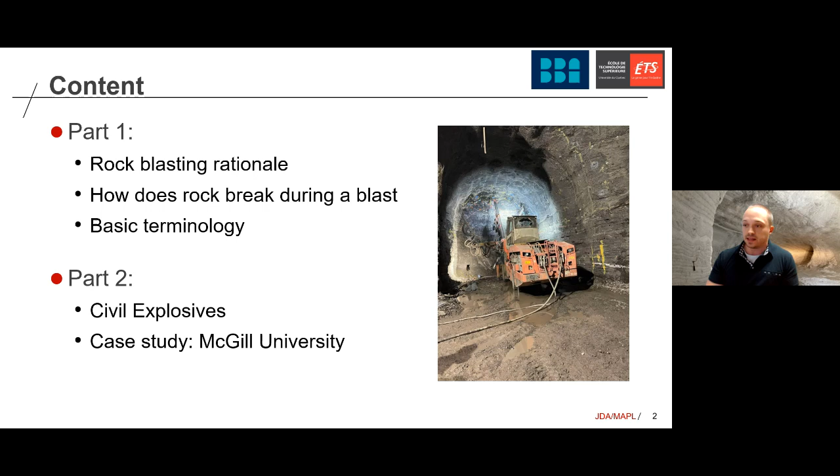So the very first thing about rock blasting intro is: why are we using rock blasting and for what purpose? From a general sense, everybody knows about blasting, everybody knows about explosives, everybody understands that rock is often broken down, loosened, fractured using explosives, but the actual engineering concepts behind them are not so common. There's various applications, from very fine, detailed, precise applications for specific construction projects, to massive bulk blasting operations in the mining industry.

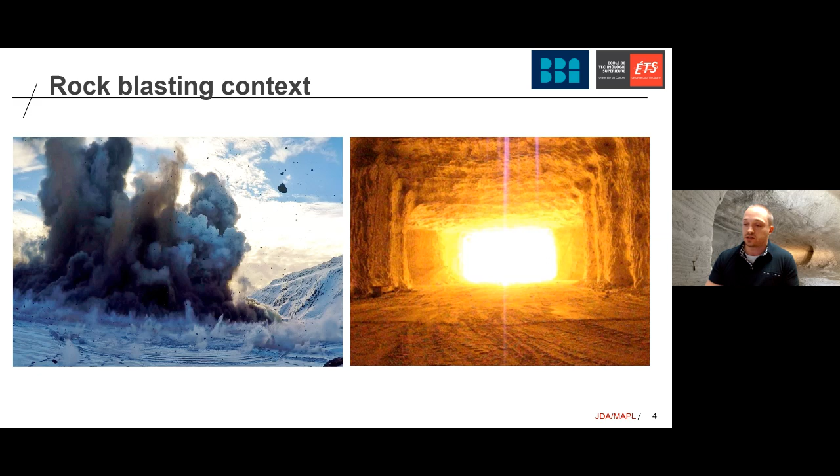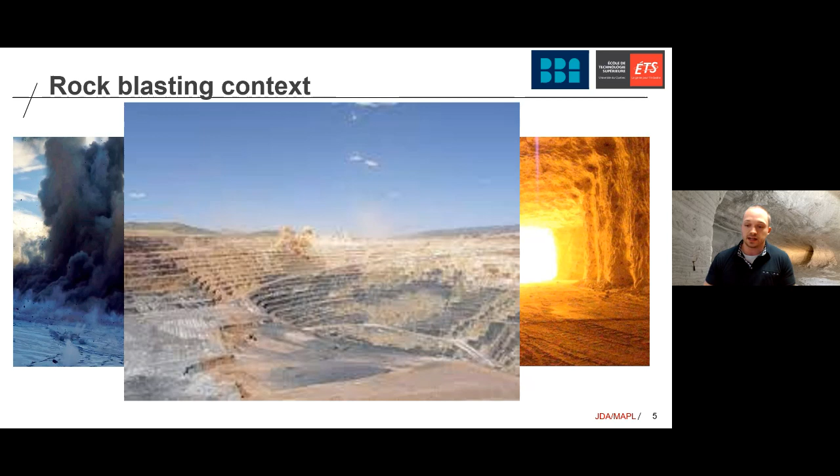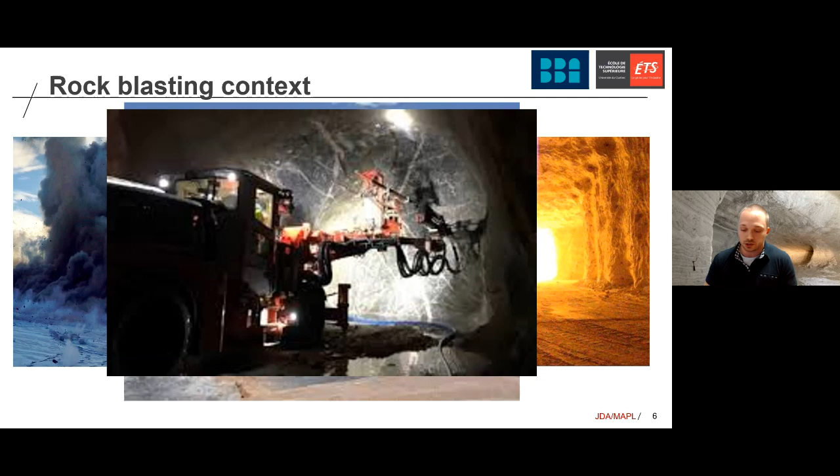So blasting is very core to the mining industry. It's something that we see a lot in the mining industry, whether it's underground or surface. It's something we see all around, almost essential in a large sense to everything that's mining related. Then obviously it's something you see a lot in the construction of underground excavations, including, for example, tunneling operations. It's very central to these applications, something that is still very prevalent despite the growing popularity of continuous miners and tunnel boring machines. Blasting, for those of interest, is also very common in highway and railroad construction.

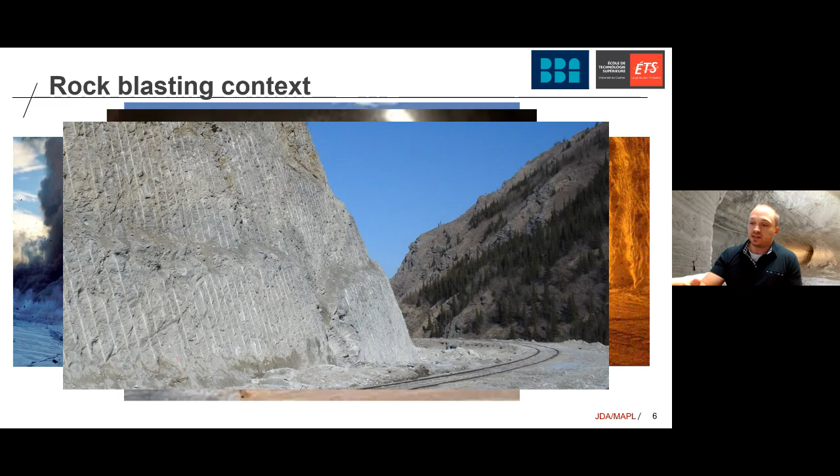You see a lot when you go to mountainous regions where you have nice and smooth roads. You'll see those nicely blasted surfaces along the road with those half moon, clearly demarked position of the blasted surfaces like you see on this picture today. You'll see that very commonly, and obviously in tunnels, like I mentioned.

A few notions: rock blasting has been around since the invention of black powder in the 17th century. Blasting took a major turn with the invention of dynamite by Alfred Nobel in 1867. Rock blasting to this day represents the most efficient and cost-effective means to break rock. It's important to understand this rationale of cost-effectiveness. It's the most efficient, cheapest, easiest way to break rock, given the mechanism of trying to fracture the rock in tension rather than trying to compress it.

There are other means of doing this, whether it's continuous miners or tunnel boring machines. Cost-wise and energy consumption-wise, this remains by far the most efficient way of doing this. Hence its prevalence in various applications, especially in the mining industry.

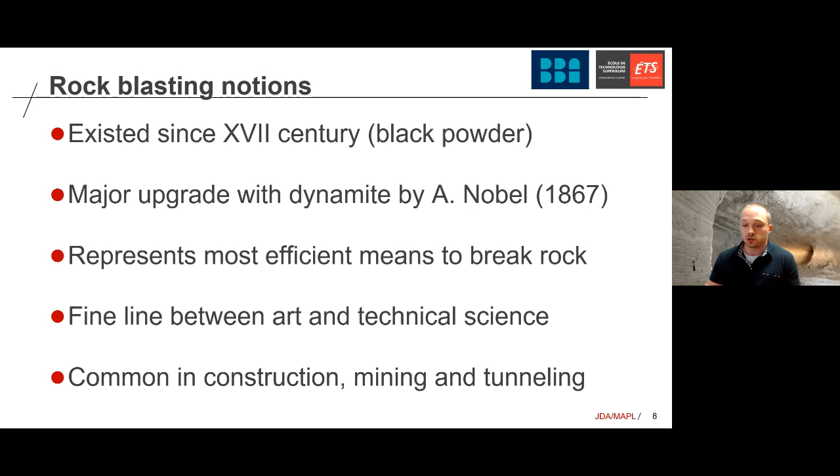If you talk to a blaster tomorrow, you'll see that there's a fine line between the technical science, the technical rationale that this operator, this blaster knows, and what he would refer to as his experience, but also what you hear about as art. I think it's important to demystify the technical from the art, actually understanding that the art of blasting essentially relies on key engineering precepts, which I'll try to showcase briefly.

So how does it work? How does rock blasting take place? What are the key mechanisms behind it? The first, I guess the chemical bit of blasting, relates to the detonation reaction.

The detonation reaction relates to the solid or liquid explosive component of the blast hole transforming into a gas. This chemical reaction, this transformation, takes place at supersonic velocity. It happens faster than the speed of sound in air or in the material you're considering. This velocity component is important because at subsonic velocity you're essentially talking about combustion. You can still have pressures, heat, and a change from solid to gas, but what marks it as a detonation, which is the chemical reaction we rely on in blasting, is the speed at which the reaction takes place, which is supersonic.

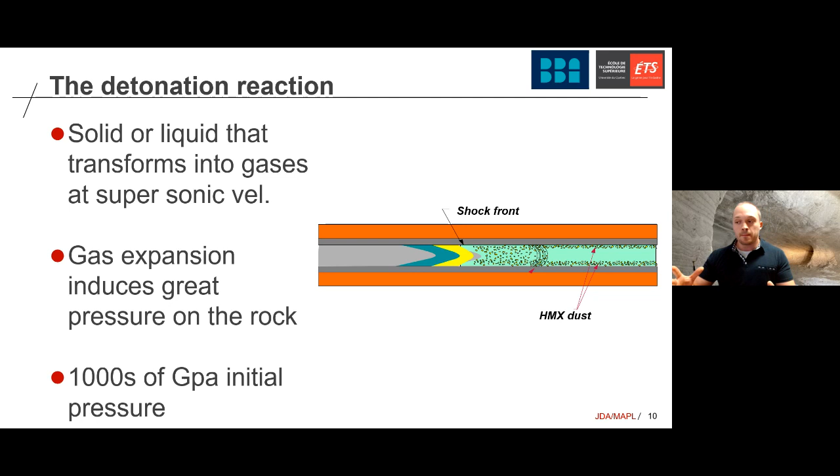When you have this explosive material turning into a gas, you exert great pressures on the rock surface in that blast hole. That pressure is sometimes thousands of GPa. These are massive amounts. Now you don't necessarily have thousands of GPa induced or exerted to the whole rock mass being broken—it's essentially at the blast hole—but this pressure allows it to damage, break, pulverize rock, and then initiate fractures in a way that will eventually propagate to a nearby free surface.

Here's a bit of a visual representation of how the detonation takes place. If you think about the initiation process, you have a cartridge of explosives here. The initiation took place on the left hand side, and as the detonation takes place it propagates through the explosive product from left to right at the detonation velocity. Now you have this gas expansion, and then you have the undetonated component on the right. This transition point from detonated to not detonated, growing gas to still virgin material, is called the Chapman-Jouguet reaction.

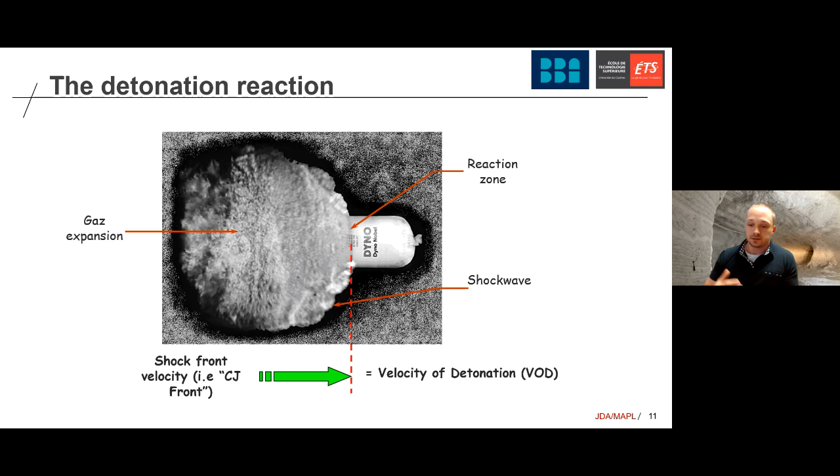Without going into much detail on the chemical aspect, it's important to visualize how this propagates, because if you have a big 10-20 meter long blast hole and the detonation takes place at the bottom of the hole, you have the same propagating detonation reaction going from bottom to top, exerting pressure to the blast hole in that sequence.

So what happens if you look at this in 2D during the blasting event? You have several thousands of GPa being applied to the rock mass, very high pressure. The rock right near the blast hole is pulverized, crushed, completely damaged. This damage zone is not very large—we're talking usually 3 to 6 or 7 times the diameter of the blast hole. But that rock is completely crushed, completely pulverized.

Then, skipping the second part, I'll go right to the third part. You have radial fractures that emanate from this completely crushed part. In between, in zone number 2, you have a mix of radial fractures and completely pulverized rock—it's essentially a transitional damage zone. But what's important to realize is that very close to the blast hole, you have pulverized, damaged rock.

Beyond this, you have a series of radial fractures that emanate radially away from the blast hole. It's important to also acknowledge that the crushing piece, this pulverizing of the rock, is where a lot of the energy of the explosion is lost.

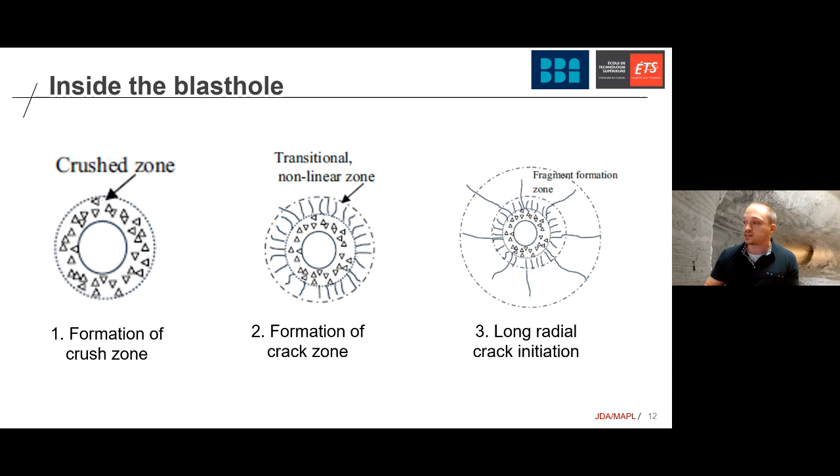Hence, you don't actually have thousands of GPa being transferred to the rock elastically. A lot of that energy is lost due to the crushing and pulverizing of the rock. What's very important from the cratering, the fracturing process, is the later stage, the radial fracture propagation, which we'll come back to in a second.

So now you have those three zones: the pulverized, the damage, and the radial cracks. Beyond the cracks, beyond those fractures, you have this pressure that was reduced, dampened by the damage, that is now transferred elastically to the rock.

In other words, you're sending shock waves away. That's where, whether you're talking about seismic activities, earthquakes, or blasting, that's what you feel. That's the shaking that takes place. This energy is transferred to the rock.

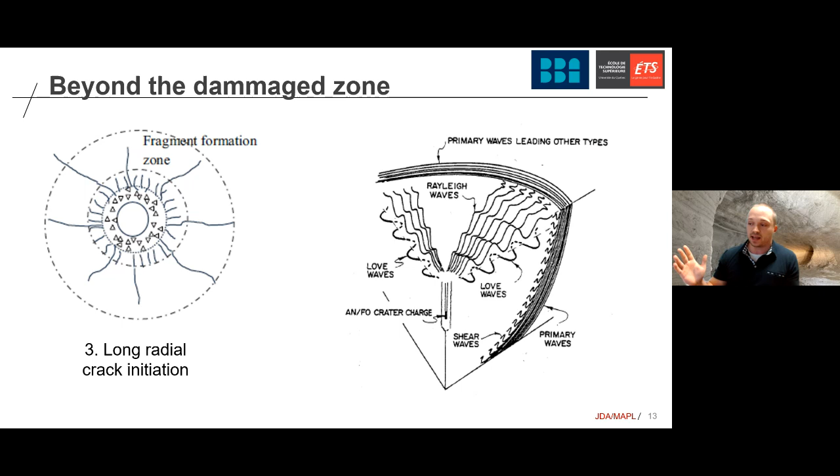Past the damage, it's no longer damaging, at least not right now, but it's sending waves that vibrate everything and potentially impact things around constructions. So this is a bit what it looks like. I think what's important to visualize is on the right how the wave propagates.

It's emitted away from the blast hole. The primary wave - whereas when you're thinking earthquakes, you're always considering the Rayleigh waves, the surface wave, the shear waves - in blasting, what really is important to us is that primary, that compressive wave, what we call the P wave, that compressive pressure emanating from the blast hole towards wherever you're going.

That's the most important wave. That's the highest amplitude in terms of stress wave being emanated by the blast hole. This is what we are designing the blasting based on. So how does it look?

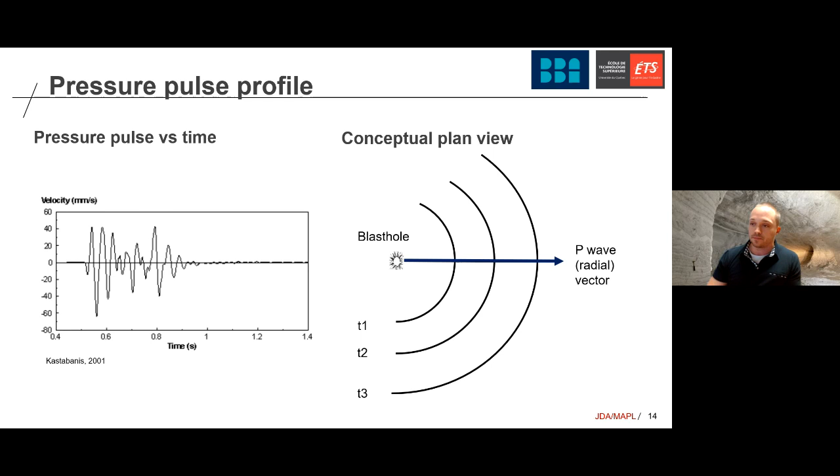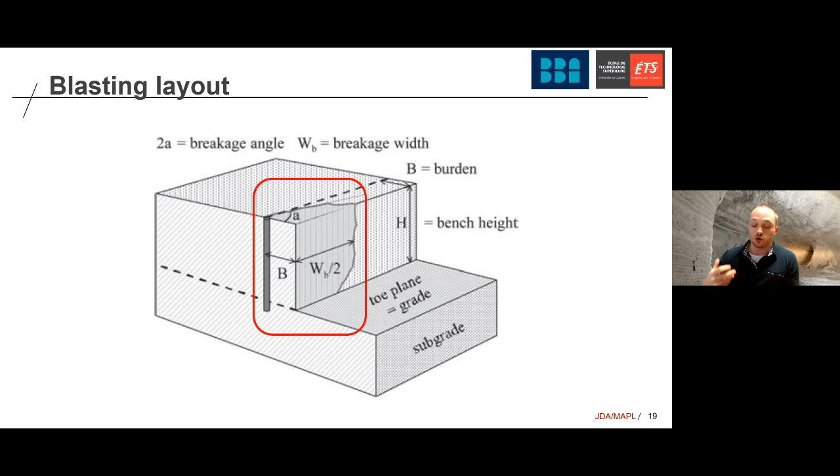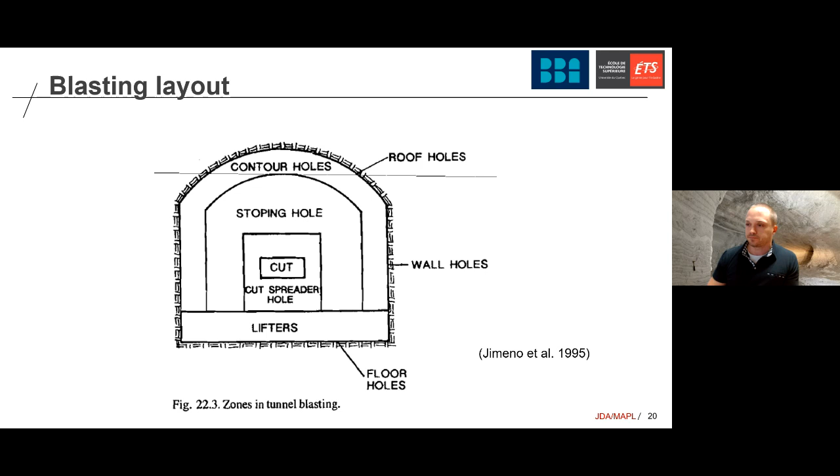So now that we have a sense of the geometry and what it looks like, the question becomes: we know we've got the P wave emanating, but what's actually breaking things? It's important to realize that the crushing and pulverizing I mentioned earlier takes place, but it's not what's driving the overall rock blasting process. When you're blasting, whether in a tunnel or mining environment, you're not trying to pulverize anything. That's not the point. You're trying to fragment the rock so it projects and gets away, and you can conveniently move it around. So what takes place, this fundamental cratering behavior which is essential to understanding rock blasting, is that you have those P waves, those compressive waves, emanating away from the blast hole.

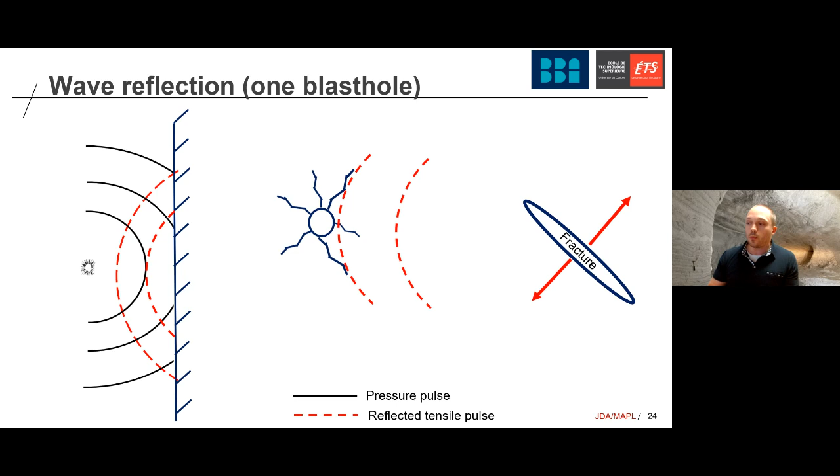Those tension waves travel back towards the blast hole. Now remember, close to the blast hole you have this crush zone, but you also have a series of radial fractures that emanated away from the blast hole. Those tensile waves interact with those radial fractures to essentially prop them open. By propping them open, they expand them until they reach the opening, and that essentially yields a crater, prismatic in look and shape, driven by the expansion of those radial fractures.

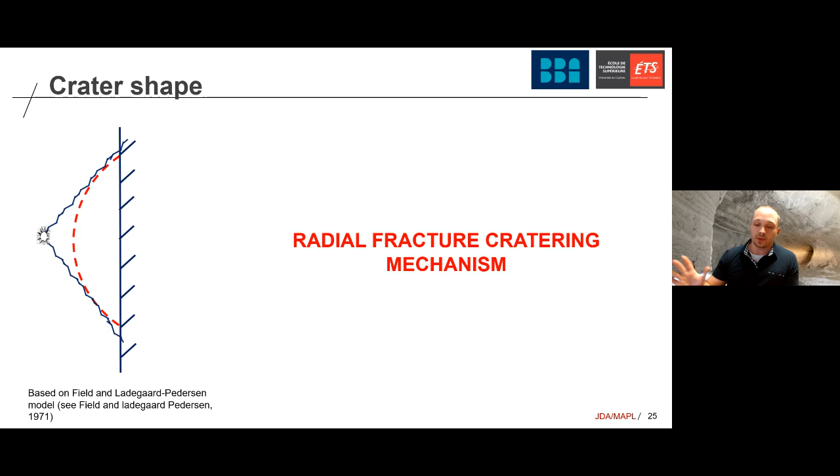So while pulverizing and crushing does take place, what's important is that reflected pressure wave coming back in tension, propping open those fractures all the way towards the free face. This is again a conceptual look of a blast, but what I like to emphasize here is that we often refer to those craters as prisms. The reason being simple: the mechanism behind this is driven by radial fracture propagation and opening.

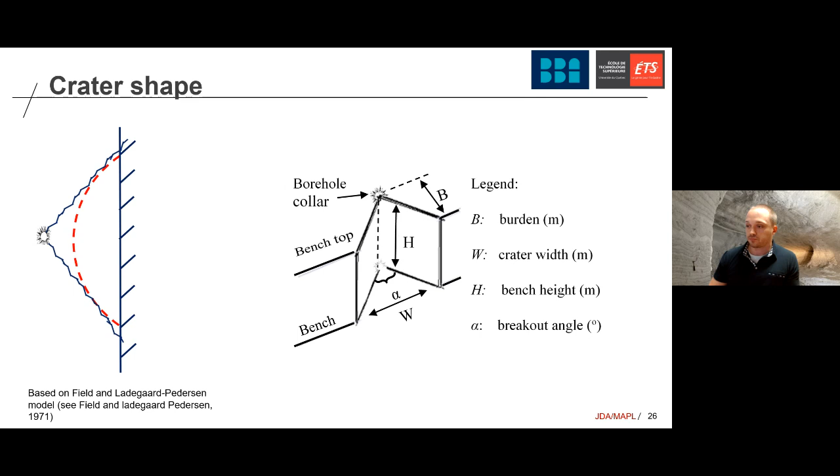So we just talked about fracture propagation. This is essentially driven and induced by the shockwave, the pressure shockwave, coming back and being reflected in tension and opening further the fractures. But what about the gases? Well, the gases also have importance. The explosives went from a solid liquid to a gas, which have pressures. The gases themselves also have pressures, which are not necessarily inducing shock waves.

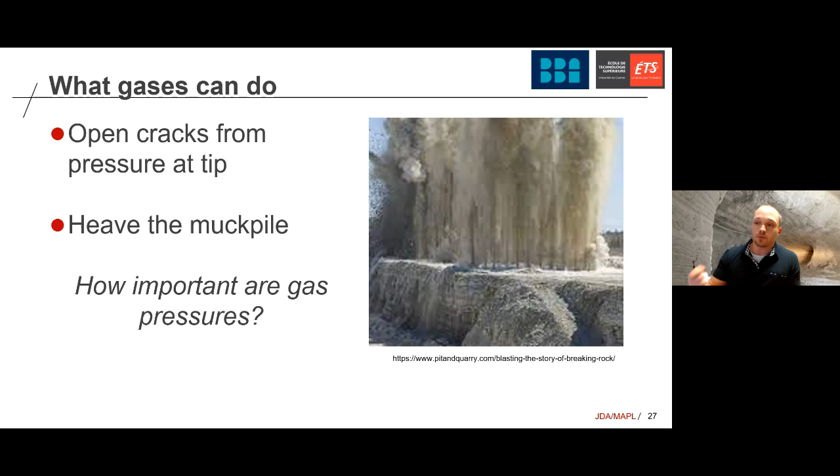They're still there as a pressure. They can open up the cracks, and they can also heave the muck pile. Their importance really resides in heaving that muck pile. There was a lot of testing done in the 70s and 80s to showcase this. They actually added metal plates at the end of a bench, on a small scale model, to show that without the gases—if you put a vent tube in a hole—you'll still get shockwave fracturing. The block will still shatter.

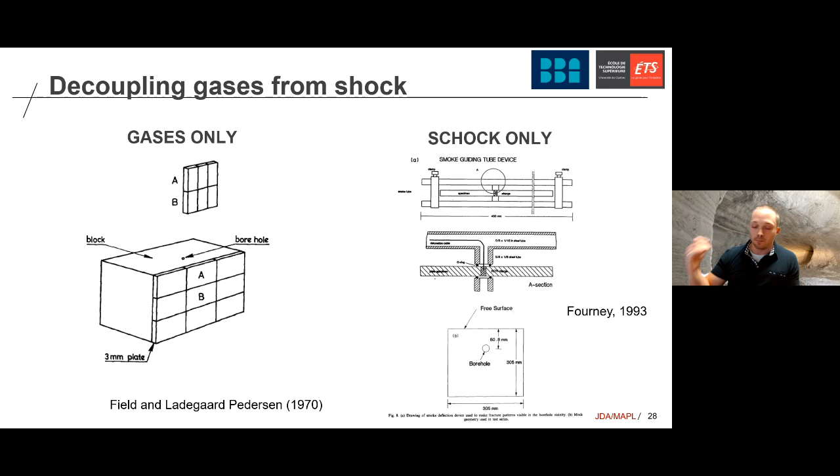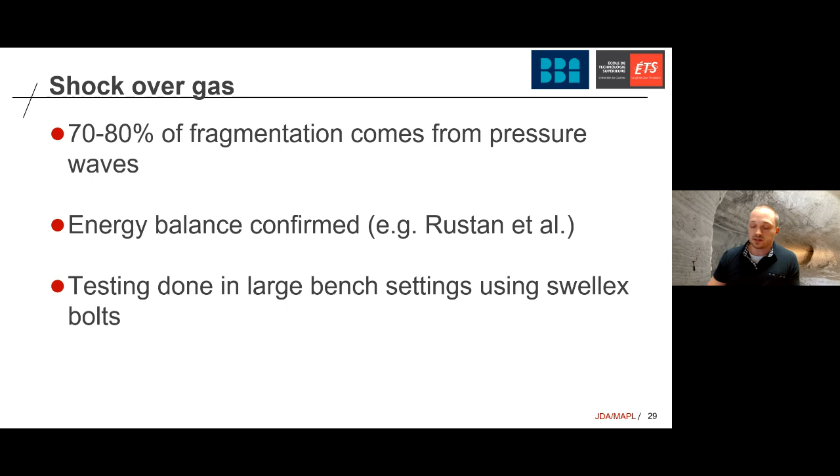Without the shock waves, only relying on gas, you barely get any fractures. So it's very important to realize that gases have some importance in the heave, but the bulk of the blasting, the fragmentation, takes place from shockwave fracturing. 70 to 80% of the fragmentation comes from the pressure waves. There was a lot of testing done to showcase this, and it's important to acknowledge.

So my final notes relating to rock blasting engineering—a bit of the things that a rock blasting engineer, especially in tunnels, has to deal with. What you're trying to accomplish when you design a blast as a tunnel engineer, especially in blasting applications, is to have a cost-effective pattern.

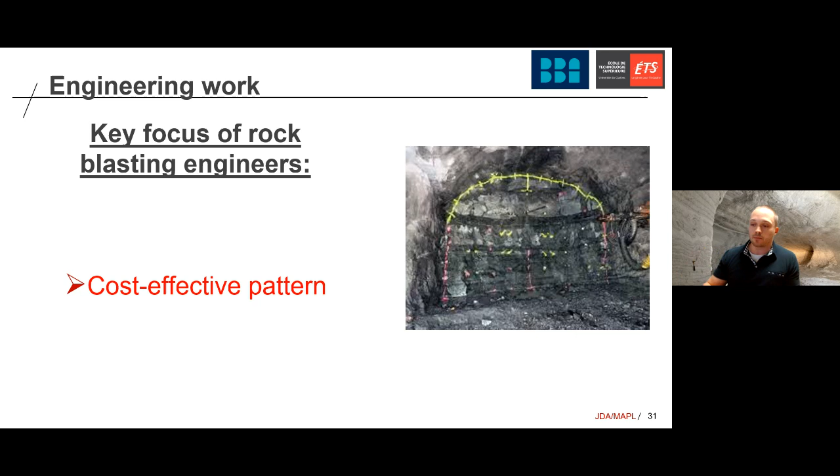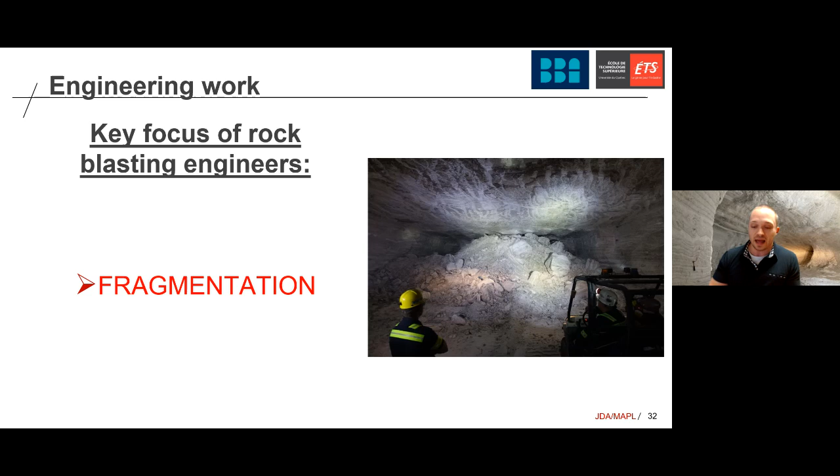You don't want to overuse explosives. This can be very expensive and time-consuming. You're trying to generate a cost-effective pattern. You're also trying to control fragmentation. If you have blocks bigger than your shovel, you're going to have a problem. If you only have fines, only small material, you're going to have muddy environments and challenges handling that material. You're trying to get that fine, ideal fragmentation.

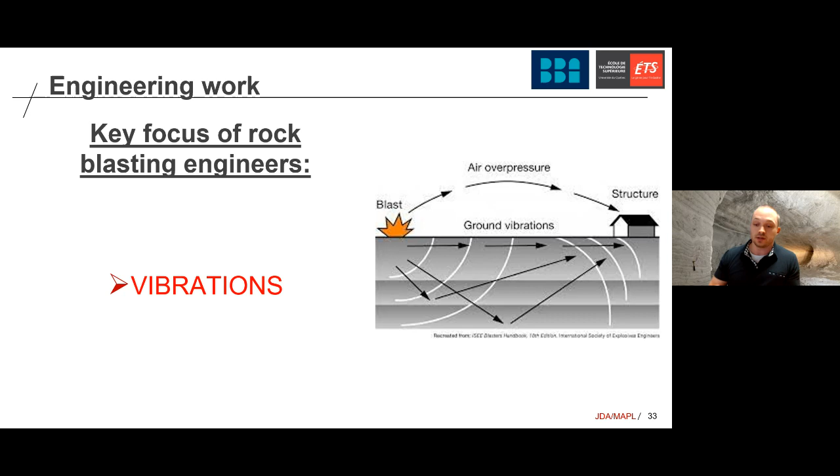Then you're trying to manage vibration, and I'll let Mark talk a lot more about it—he's got very interesting case studies to discuss. Vibrations are a big component of explosive engineering because you don't want to induce too much vibration, especially if you're constructing a tunnel downtown in an urban area where you've got buildings all around.

Then of great importance is also gases—everything pertaining to toxic gases: NO2, NOx, CO, CO2. These are gases that result from the explosive processes, and if you're not ventilating properly, it can be a problem. If you're using too much explosive, going overboard, you can end up with too much gas. It's the role of engineers to control this, mitigate this, and measure this to make sure workers are not overly exposed to those toxic gases.

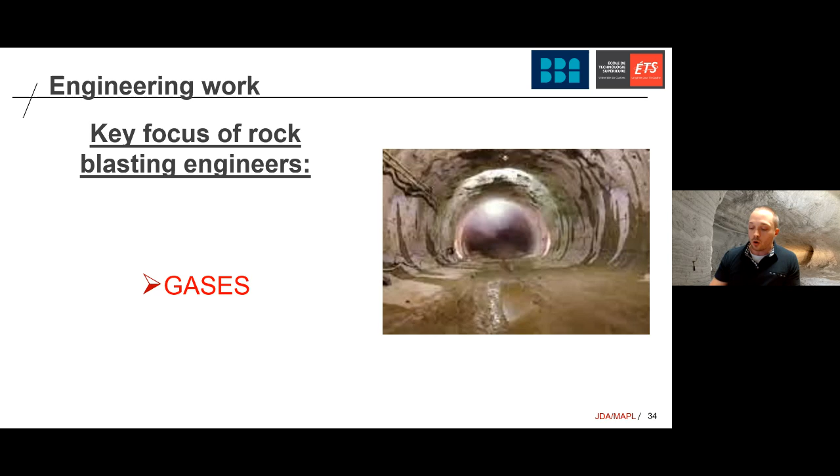So this concludes my rock blasting 101 section. I'm happy with the timing I've got here. I'll stop sharing my screen just for a second so my colleague can start sharing his, and I'll let him do his thing.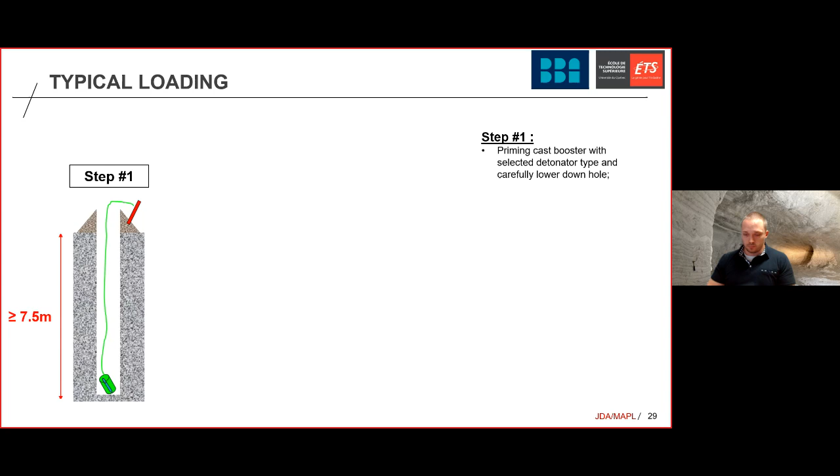So to be able to reach that breakage mechanism, here are the few steps we need to do. We're going to go through the different types of civil explosives we see in this industry nowadays, and we're going to finish with some quick slides about a project BBA worked on in downtown Montreal, which required blasting access shafts and tunnels with explosives.

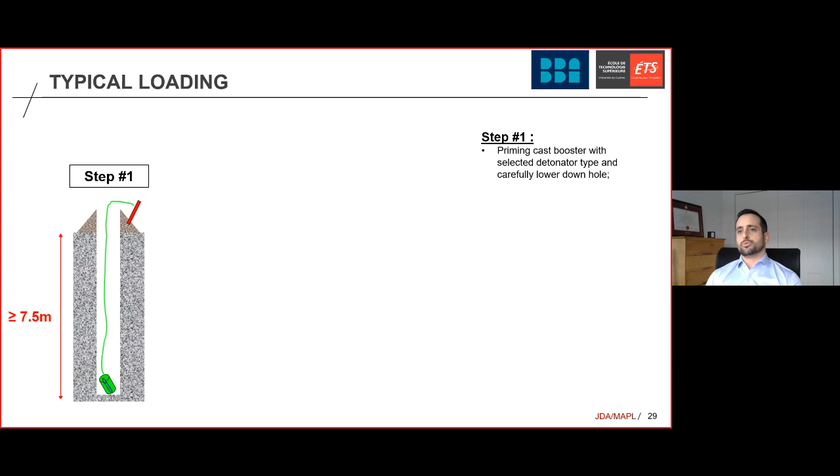So step number one, when you have a hole drilled, you need to load it. The very first step is to install a detonator with a booster. Step number two is to load the rest of the hole with bulk or package explosive.

So any type of blasting you do, there's always going to be a chain reaction. You need a detonator, you need a booster—which is the green little cylinder—and then you need a column of charge. Your detonator will always be the first initiation that initiates the booster, and then the booster will initiate the rest, the bulk part or bulk explosive inside the hole, whether it's package explosive or bulk explosive.

There I put a note: if the hole is greater than or equal to 7.5 meters, you're going to have a second booster. If the hole is short enough, you only need one booster and one detonator. But if it's longer than 7.5 meters, as good practice in the industry, you're likely to have a second one.

Then step number three, we stem the hole. So basically, when you have a hole—no matter the length, no matter if it's vertical or horizontal, open pit, quarry, civil, underground, whatever—as a good practice, you never load the explosive all the way to the collar of the hole. You always leave a section filled with inert material or crushed stone.

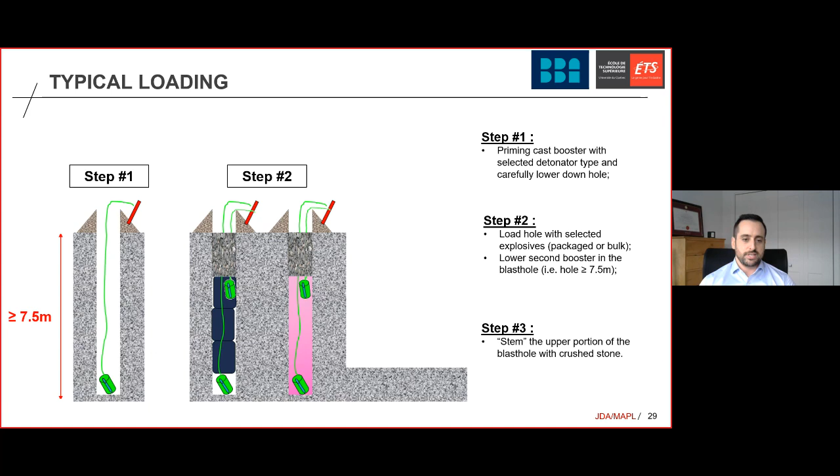So when your charge detonates, there's a certain confinement. As Jonathan explained, you have gases and a shock wave generated during the initiation. Having the upper portion of the hole stemmed with crushed stone keeps most of the energy and the gas inside the rock, which is what we want to break.

Then let's start with what we need to have an explosion, a detonation. Basically we need the detonator. In the industry nowadays, we have four types of detonators: electric, non-electric (also called NONEL), electronic, and wireless detonator.

Wireless, we're not going to cover today. Basically, electronic and wireless are both electronic—the main difference is that one doesn't have a wire and the other one has one. Electric detonators you might not see a lot in the industry during your career, because that type of detonator is kind of disappearing, as everyone's going towards electronic and still using NONEL. One key thing to keep in mind: each of these types of detonators has its own initiation system. You can't initiate an electronic detonator with a system used for NONEL, and the other way around as well.

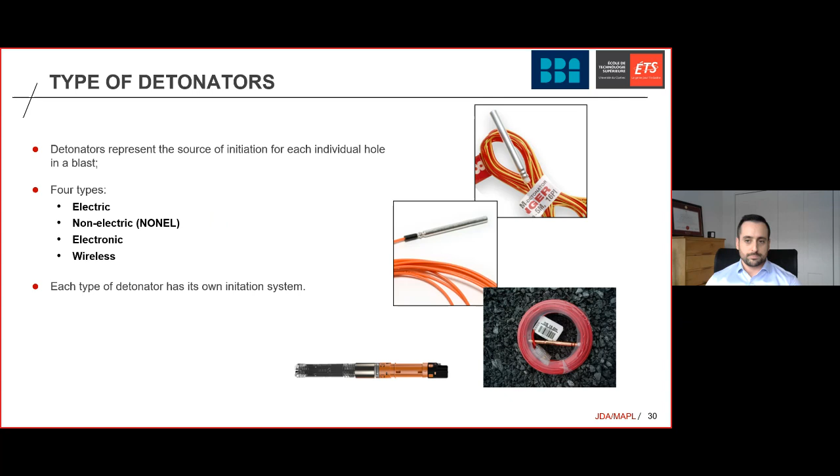Another difference - let's look at non-electric and electronic detonators because they're the ones you're more likely to see in your career in the industry. The main difference between electronic and non-electric is the type of tube or wire. Electronic is literally a lead wire, while non-electric is a shock tube that is coated inside with an explosive powder, which we'll cover in a few slides.

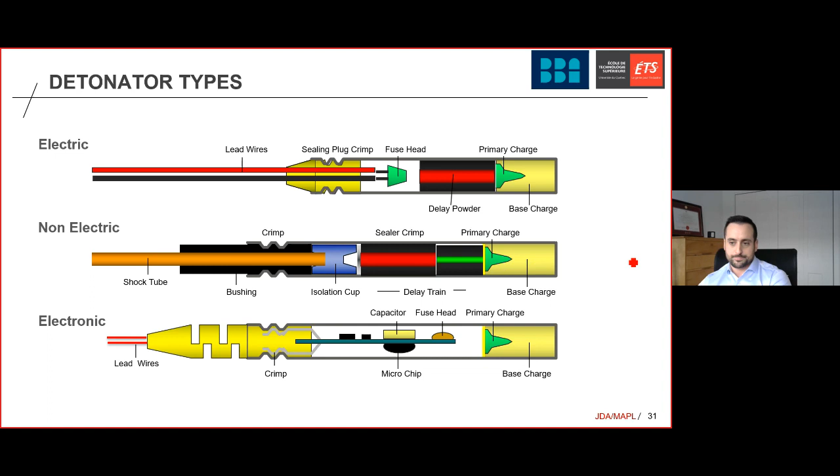The non-electric type of detonator is used quite often in the civil and tunneling industry. One of the key components of non-electric is the tube, the shock tube. It's not a wire, it's a tube with 3 layers, with an inside coating of HMX and aluminum powder.

When you pinch that tube, you're able to fire the powder inside, and this is how the current, or the fire, is given to both ends of that whole system. It travels inside when the powder fires, at 2100 meters per second, which is a quite low velocity of detonation, as you'll see throughout my section of the presentation. One key thing is that when the powder inside the tube fires, the tube stays intact, even during and after the detonation of that powder.

So if after a blast you go back to the field and still see those shock tubes, don't be scared - it's still fired. It's not because you still see the tube that these detonators didn't fire properly.

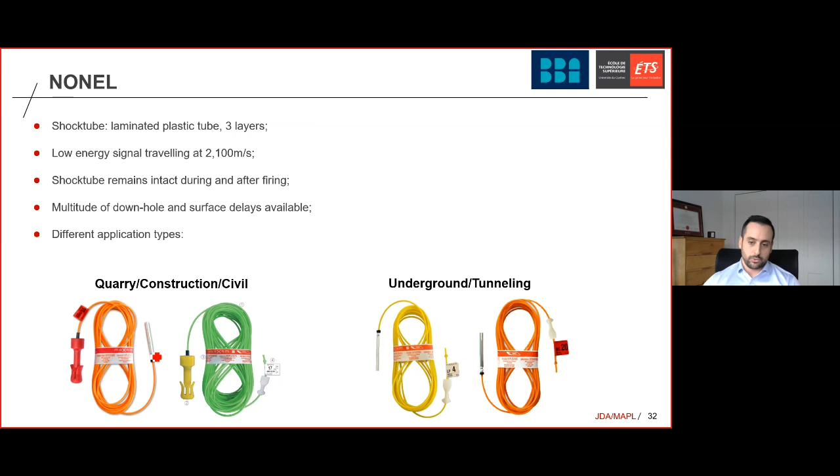There are a multitude of downhole and surface delays in the non-electric world. Unfortunately we can't cover all these types of non-electric detonators today, but keep that in mind - there are different applications. As you can see here, we have 4 different types, some with surface connectors in different colors. One key thing is they all have shock tubes, they all have at least one aluminum shell, which is the main part of the detonator, and they all have pre-established delays, either in the clip that stays on the surface or in the detonator, the aluminum shell that goes inside the hole.

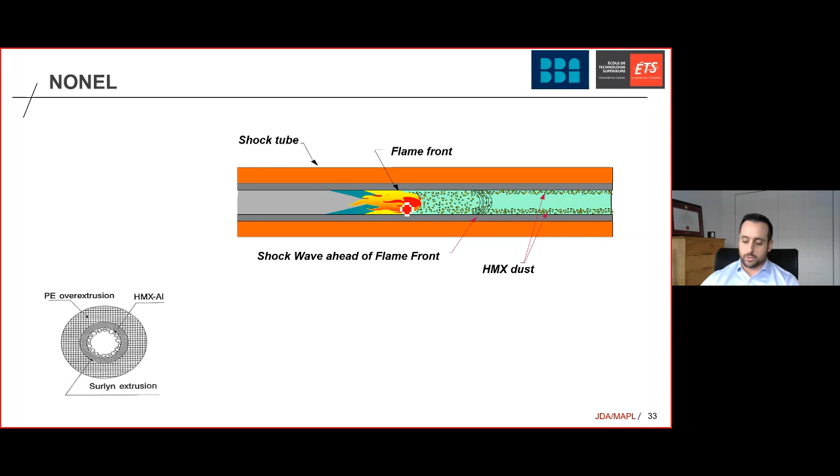Same illustration that Jonathan showed earlier. When the shock tube gets pinched and the powder inside starts being initiated, it travels through, it burns and detonates - well, I'd say it's more a detonation because it's 2100 meters per second, which, depending on the tube, is a VOD between 1800 and 2100 meters per second to be specific. This is how the powder inside the tube fires. Here's a cross section - we can see the different layers of plastic shaping the tube, with the coating inside of HMX and aluminum powder that is meant to give the initiation, or the current, inside the tube to reach the aluminum shell.

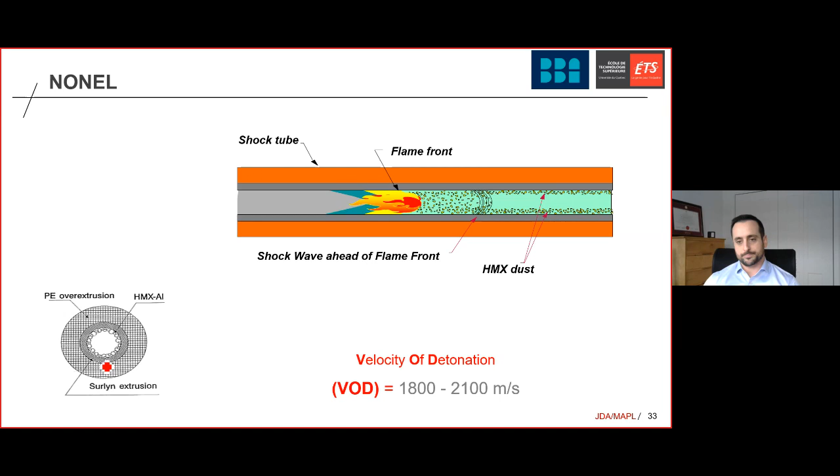One key thing you need to keep in mind when using Nonel is that connections need to be physical. You need to connect the holes in the order you want the fire to be given between each hole. Your first row needs to be connected together first, then you connect it to the second row, third row, and fourth row. While when you're using electronic detonators, you don't need to follow a specific connection pattern. That's the main difference.

Electronic detonators are 100% user programmable detonators. You can give them increments of 1 millisecond at a time. Most of the time, depending on the explosive supplier, the window in which you need to program your detonators will be between 1 millisecond up to sometimes 30,000 milliseconds, or 30 seconds.

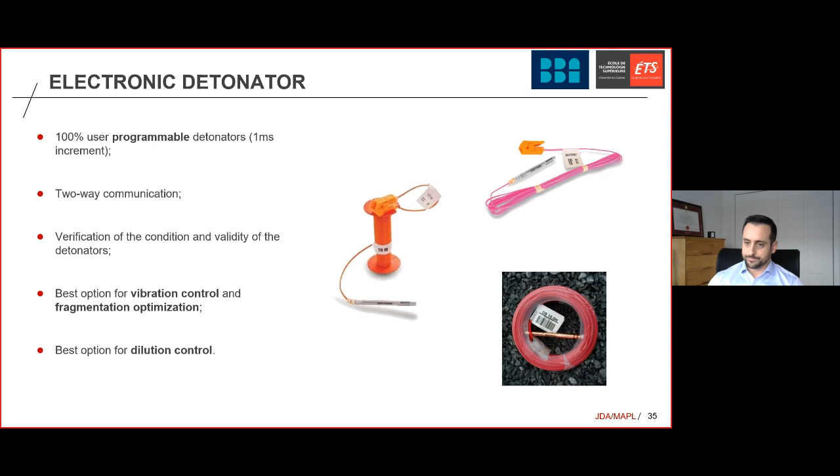Then there's going to be the booster. As I told you a while ago, there's always going to be one detonator combined with a booster, and then the booster will give the initiation to the column of charge. This is the second step in a hole loaded with explosive.

Boosters are used because the third part of your chain reaction, the bulk explosive, is not sensitive enough to be initiated only with the detonator. You always need that second step, which is the booster.

Boosters are also called cast boosters in the industry. We basically pour a liquid mix of PETN with sometimes other high explosive, molecular explosive. The main one we see in the industry is pentolite, which is a mix of PETN and TNT.

In the illustrations on the right side of the slide, these red pellets are going to be 100% PETN, specifically placed in the cast, and the rest of the cast will be the mix of pentolite. This little section here will be pure PETN, because this is where your detonator will go—this is where the section of your booster needs to be the most sensitive.

VOD here—remember this term, velocity of detonation, extremely important. We see here PETN at 7,550 meters per second, which is extremely high.

When you initiate a column of charge, you always need to initiate an explosive with another explosive that initiates faster. You always need more energy, more pressure from the giver, the donor, to the receiver. That's why PETN is used for boosters, to be 100% sure that no matter the bulk explosive you're using to load the blast holes, it's going to be initiated with something that has a higher pressure.

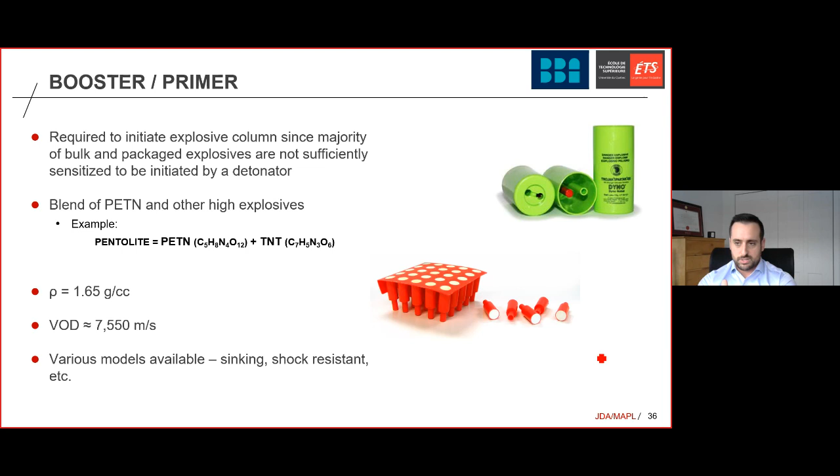This is how you install the detonator inside the booster. No matter the explosive supplier or the model of your booster, they're always going to have one side with one hole and the other side with two holes. You insert the detonator on the side that only has one hole, and then on the other side you loop it back into the cap well. In the cap well, that detonator needs to go into that specific well, because this is where you have the red pellet, the pure PETN section, the most sensitive section of your booster.

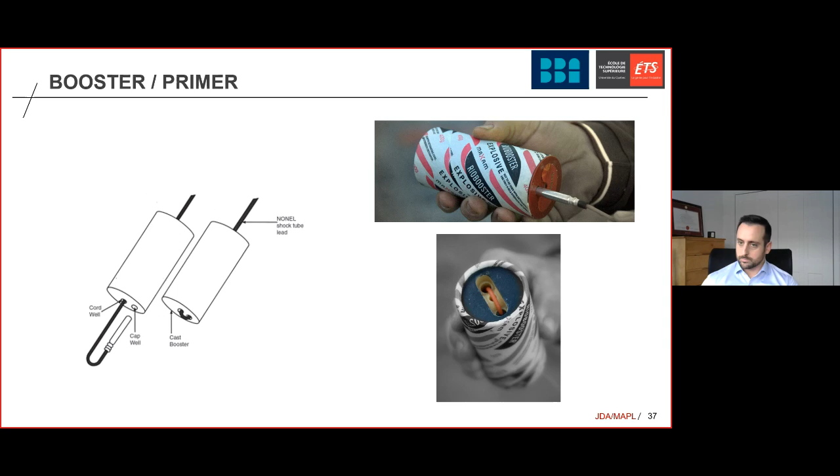Now the third part of that chain reaction inside the blast hole is the bulk explosive. There are a few different types of bulk explosive. Since we only have one hour in this presentation, I went directly to the bulk explosive called emulsion. There are other types, but nowadays this has the best water resistance, and it's the explosive mostly used, no matter if you're in quarry, civil construction, underground, tunneling, or mines. Bulk and package emulsion - you can have it in two different forms, either in bulk or in cartridges. This is the bulk explosive mostly used.

It's a water-in-oil structure, basically a mix of a few components, mainly ammonium nitrate, because ammonium nitrate has the oxygen, and it's mixed with a fuel phase and some other components, a little bit of water as well. The main advantage of bulk emulsion is that you can play with its viscosity and density. Depending on your rock mass parameters, depending on what type of blast you want to do, if you want to reduce your gases, have more shock, more heat, you can play with the density and the components inside.

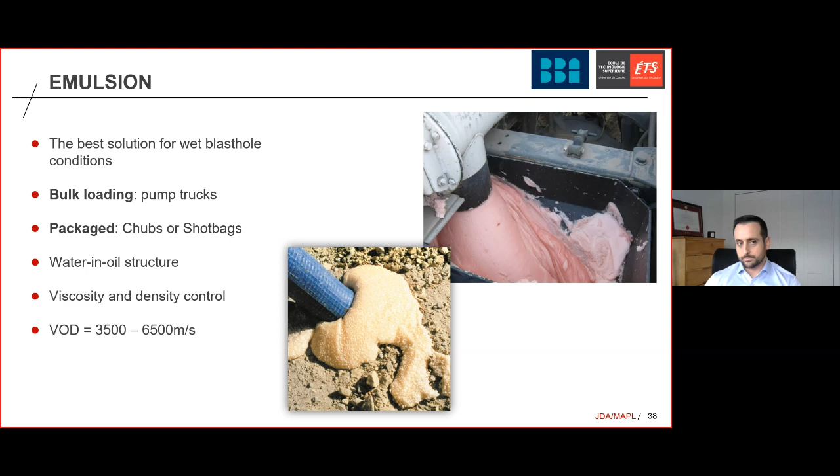Then package emulsion - that's the exact same thing I just showed you, but put inside cartridges. This is used in tunneling blasting, one of the mostly used types of explosive there. It's emulsion put inside cartridges or plastic films. The main advantage is that it's easier to load, easier to carry - you just need to carry boxes. You don't need to bring the big bulk truck, because underground, for tunnels or shafts, bringing bins and trucks is a bit more complicated. So bringing boxes with package emulsion is easier, and you can control more easily the amount of kilograms of explosive you put inside the hole, especially when you need to respect your vibration limits. You don't want to start losing explosive and creating pockets in cavities if they exist. Package emulsion gives you better control of the kilograms of explosive amount.

These explosives can be used depending on different mixes - as you can see, some have different colors, some have other components. You can still see the solid ammonium nitrate prill inside some of these products. They have different forms, different diameters, different lengths, so they have a lot of different applications, from pre-splitting, decking, difficult hole conditions, trenching where you only have one free face and all the holes are extremely close to each other, where you can sometimes have extremely high shock wave levels.

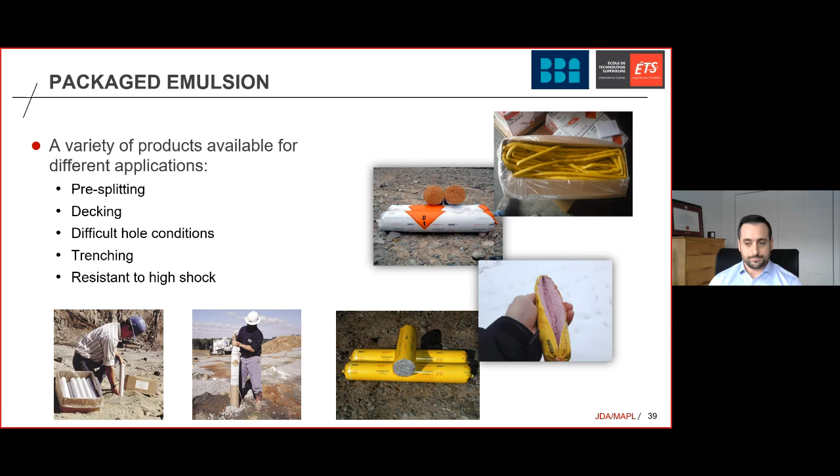Another type of packaged explosive is dynamite. Dynamite is still a product we see in the industry, but it's kind of disappearing because it contains nitroglycerin at 50%. Nitroglycerin is extremely sensitive and extremely powerful. Since the 80s and even before, there's been a lot of accidents at manufacturing plants, where literally the plants totally disappear when an accident starts a fire and explosion. There's nothing to do, it's too late.

So companies started going more towards packaged emulsion. Even though dynamite is extremely powerful, with a range of 5,000 to 6,000 meters per second, you'll still see it in the industry once in a while in very hard ground conditions. It's a product that can withstand high shock in the presence of water. For example, when you have a lot of holes close to each other, the dynamite can withstand the shock from neighboring holes firing before. I still wanted to cover it because in tunneling, once in a while, you're going to see dynamite used.

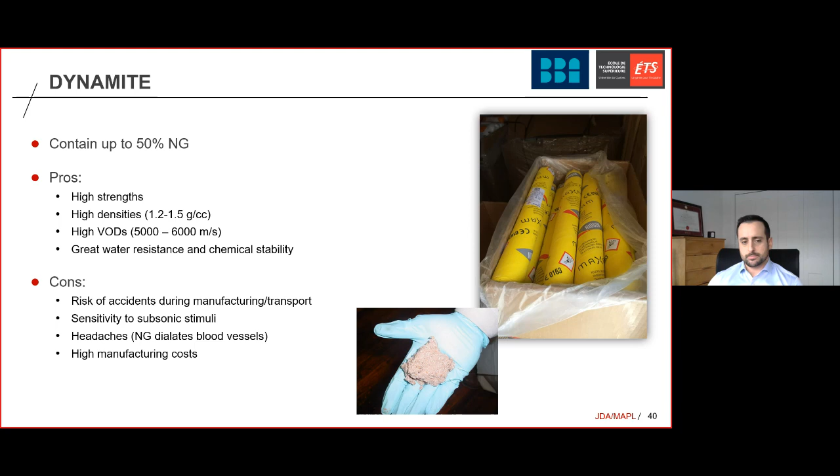The last type of civil explosive you'll see in tunneling is detonating cord. Basically, it looks like a rope with a core of PETN. PETN is the exact same explosive we find in boosters, so we have a very similar VOD.

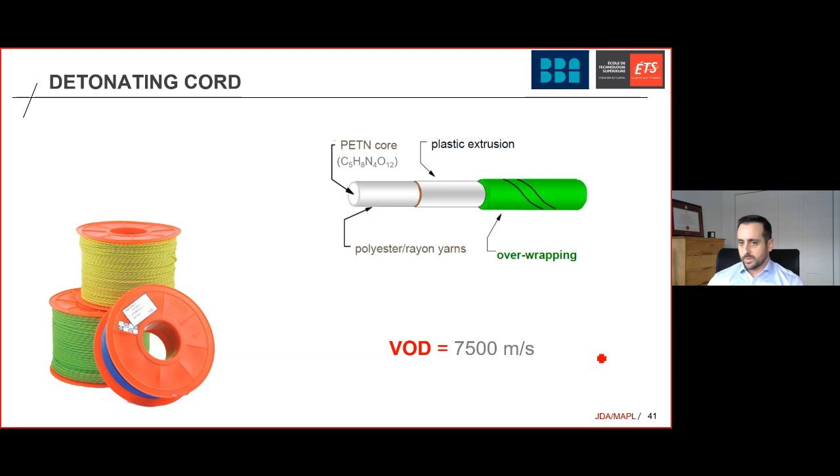Now we're going to talk about that case study. I kept it very brief. That's a project we worked on downtown Montreal, under the McGill Hospital. There was an already existing tunnel network, shown in blue and green on the picture. What we needed to blast was the red section.

We had one access shaft and three accessory or auxiliary shafts, and a network of tunnels linking these shafts together. It was done between April 2014 and April 2015, right under the McGill Hospital. We were extremely close to existing structures, buildings, hospitals, and surgery rooms, so vibration control had to be followed.

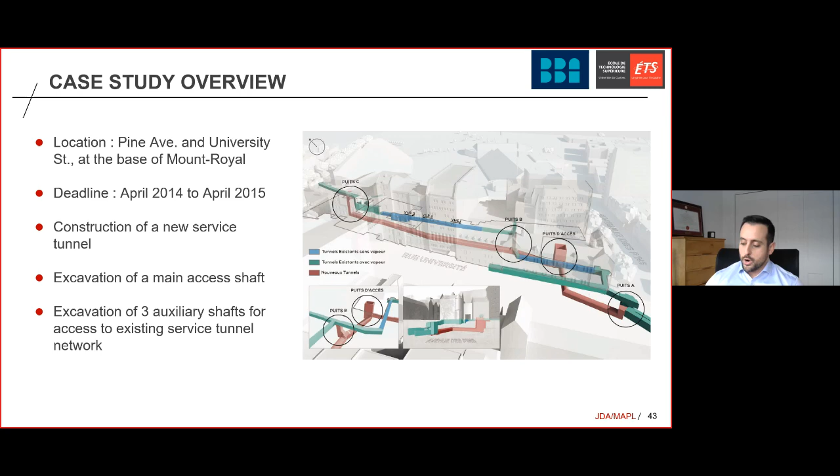The amount of kilograms of explosive put in each hole needed to be controlled, and there were seismographs everywhere. Unfortunately, that case study alone could be presented for over two hours, so I just wanted to show you the specific blast designs we used for the main shaft and the tunnel sections.

The contractor came to us, along with the engineering company in charge — at that time it was Nelson, who was overseeing all the excavation. Hatch was also involved, because in Montreal, or anywhere in Canada, as soon as there's talk of tunneling, Hatch is involved. They came to us because they realized they couldn't do it with TBMs or specific tunneling machines. They knew they needed blasting because the excavations were quite small.

So at first we looked at the excavation — the amount of rock we needed to excavate for the access shaft. In terms of design, you need to look at your vibration limits first, which you need to respect for the surrounding structures near your excavation site.

Because of those vibration limits, for the access shaft we cut down the excavation into benches of 1.5 meters high, and each bench was separated into 3 blasts, as you can see in the left picture. Each bench was split using a sinking cut, which was the first blast of each bench. Once you have your free face created, you can blast your second section of that bench, and then finish with a slightly bigger third blast.

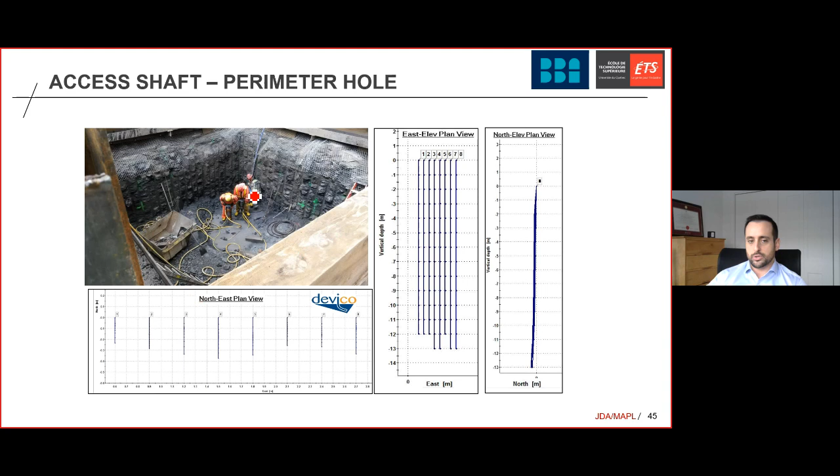I wanted to show you the loading procedure and loading specifications, since we just went over the different types of explosive used in the industry. This case study shows the package explosive, package emulsion, exactly what they used for this specific project. They used package emulsion, detonating cord, and Nonel type detonators.

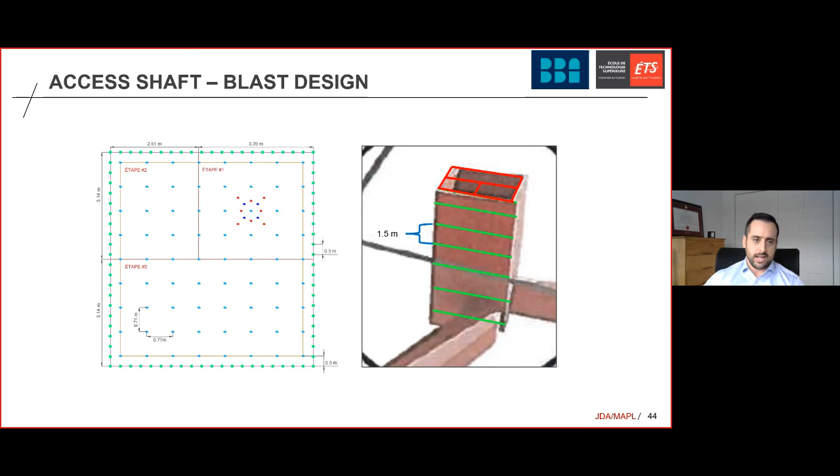If we look at the perimeter holes, those are the holes in green all around the excavation limit, where the holes are closer in spacing. For these, they only put half a stick of package emulsion at the bottom of the hole, connected to one string of det cord. You don't need to blast or load the hole entirely, you just want to create a shear wall, so you don't need that much explosive in the perimeter holes. Just one string of det cord, 400 grain, is enough to create that split, since the holes are closely spaced and will just connect and create the shear wall.

This is how you get those half moon or half barrel shapes all along your perimeter or excavation limit. This is how you do pre-shear or pre-splitting, this is where the term comes from. Then for the mass holes inside your excavation or inside the bench, the guys were using 2 to 2.5 sticks of package emulsion.

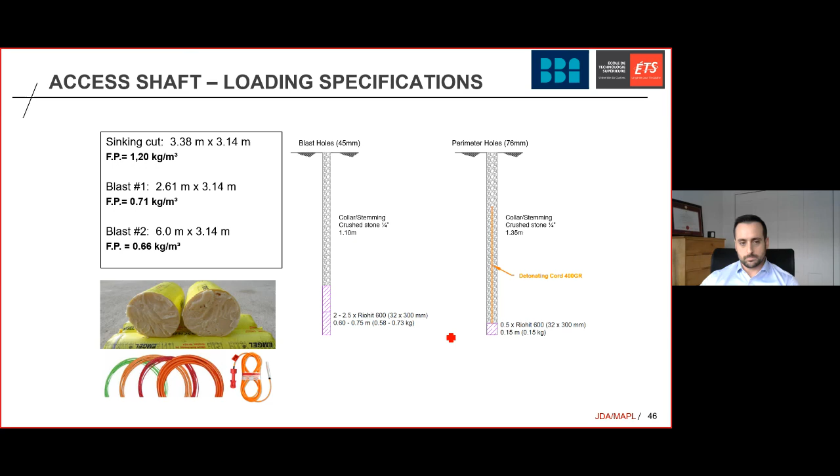So this is on the excavation while the shaft was going down. You see the guys there in a new bench. This is blast number 1, here there will be blast number 2, and then blast number 3 would be right here. As they go down, they protect the wall as well.

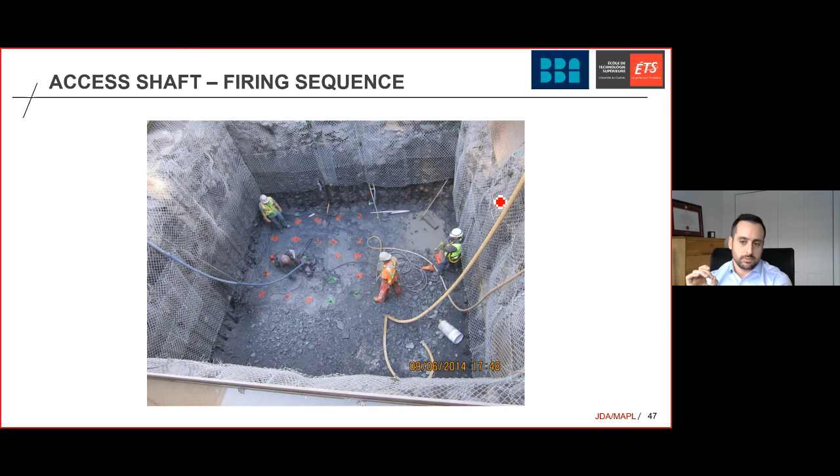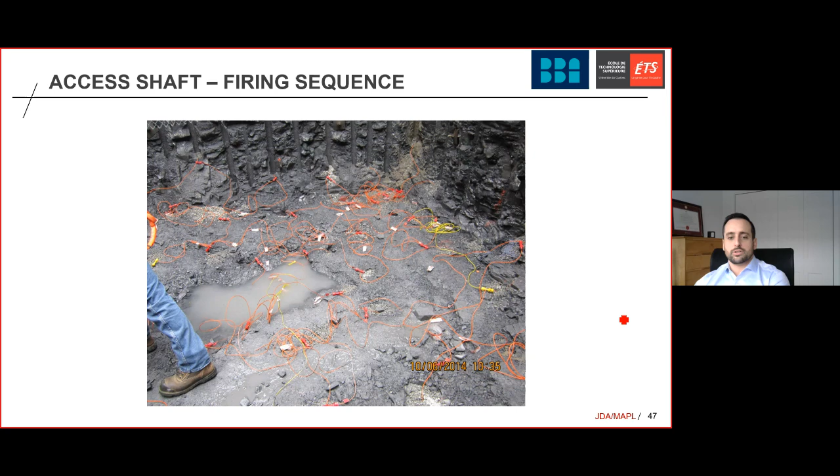You can see half barrels, which are obtained from not loading the holes entirely to the full diameter. That's why they're using det cord to have decoupled charges. The guys are loading, and at the end you can see these Nonel type detonators connecting from hole to hole according to the fire sequence you want to apply.

Then in the final section, once we were at the bottom of the access shaft, we started going horizontally, drifting the tunnels. Here the round, or hole depth, was 1.8 meters. You could go longer in the mining industry for underground mines, sometimes much longer, but in this case it's all about the number of explosives per hole being detonated on the same delays, because of vibration limits you needed to respect, since you're right next to the McGill hospitals with patients in surgery and people in the hospital. So vibration limit was extremely important to follow during these projects.

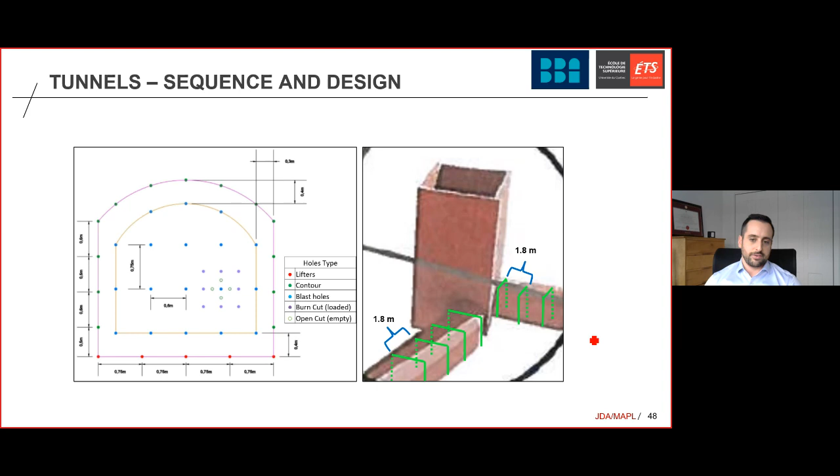In terms of loading, there were two types of holes: the perimeter holes, which are almost the exact same as when we were going vertically. The only difference is that as we were going deeper and further from the monitoring point, we were able to start loading with more cartridges of explosive inside the hole. For blast holes, instead of 2 to 2.5 sticks, we were able to go up to 4 sticks of Riohit 600 series.

So by doing so, you're able to take bigger blasts, to have better fragmentation for the mucking. And then the perimeter hole is quite similar. You can see here, instead of half a stick at the bottom of the hole for the perimeter hole, we were allowed to put one full stick and still put the det cord inside the hole to decouple the charge.

That's to be able to get that well-sheared section of your excavation. One important detail here is those clay sticks. Usually in underground blasting, because the holes are horizontal, you don't stem the holes, because it's too complicated to put crushed stone. But in this case, because noise was an issue and there was a certain noise limit to respect, all the holes were stemmed with clay sticks to make sure there was confinement, reducing the amount of overpressure generated during the detonation of each of these blast holes.